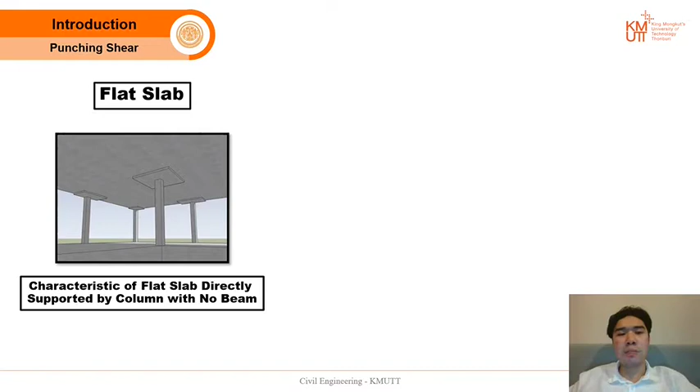Moving to our introduction: nowadays people use flat slabs for a series of advantages by eliminating beams. Concrete formwork and scaffolding are simplified, making construction faster, easier, and less expensive. But since the flat slab is directly supported by the column, it is more vulnerable to punching shear failure compared to other conventional slabs.

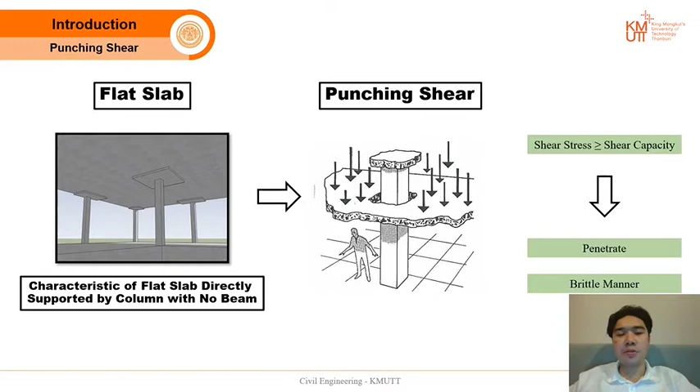Punching shear failure in a flat slab occurs when shear stress exceeds shear capacity, causing the slab to penetrate through the column as shown in this figure. To prevent this, we need to strengthen the slab against punching shear failure.

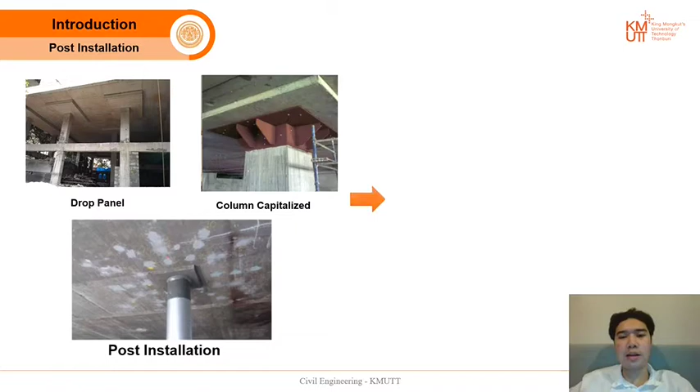This slide shows all the methods that can be used to strengthen the slab: drop panel, column capital, and post-installation. We selected post-installation because it maintains the original geometry, keeps the intervention invisible, and does not increase size or weight.

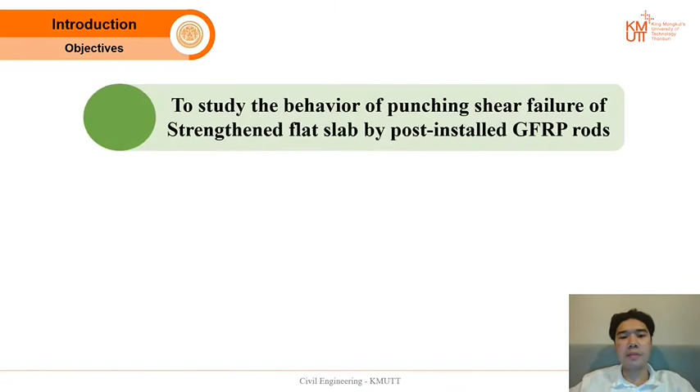Our objectives: first, to study the behavior of punching shear failure; second, to study the effect of at least three strengthening patterns, consisting of cruciform, double line, and radial.

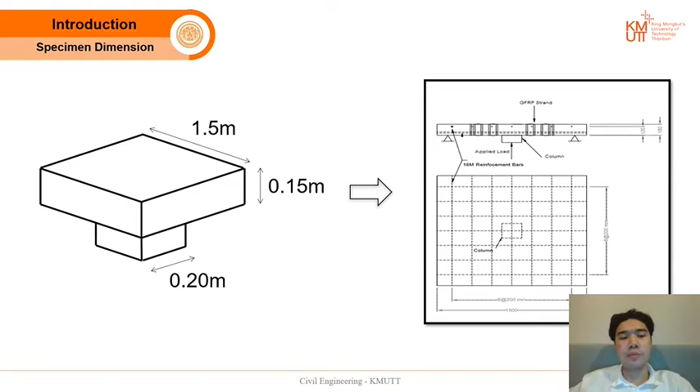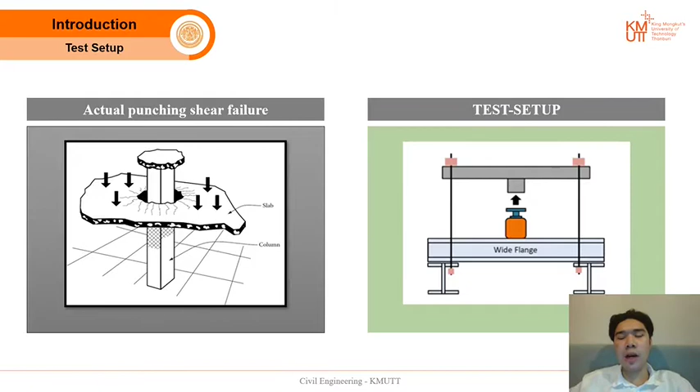Moving to our test setup, shown in the right figure, our test setup was simulated to match the actual punching shear failure that occurs in real construction, by applying force with a hydraulic jack upward into the point of the column.

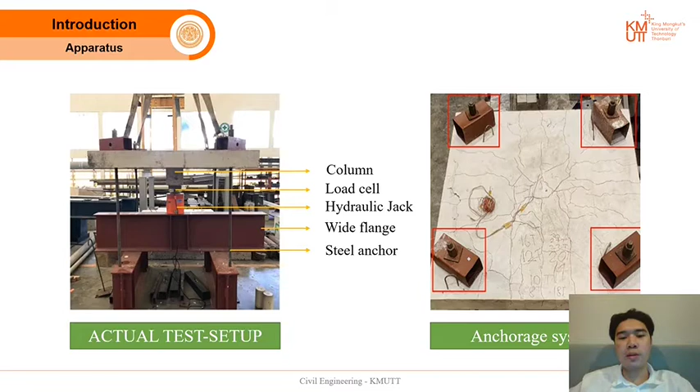This slide shows the apparatus used in our test setup, and the specimen is held into the test setup using an anchorage system.

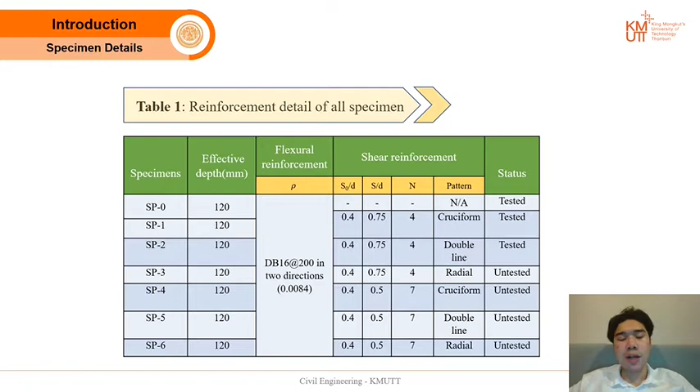Moving to our specimen details, which are classified into three different patterns: cruciform, double line, and radial. Each pattern is divided by a different number of rebar lines, with 4 and 7 respectively, as shown in this figure.

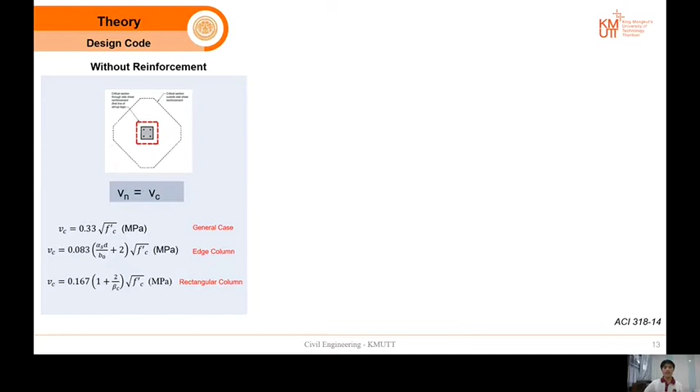Shear strength is referred to design code ACI 318, version 2014. For a flat slab without shear reinforcement, shear strength is provided only by concrete, with three equations governed by the minimum equation. With shear reinforcement, and failure within the shear reinforcement section, shear strength is provided by both concrete and shear reinforcement, with a limit imposed on the cumulative strength to avoid concrete crushing.

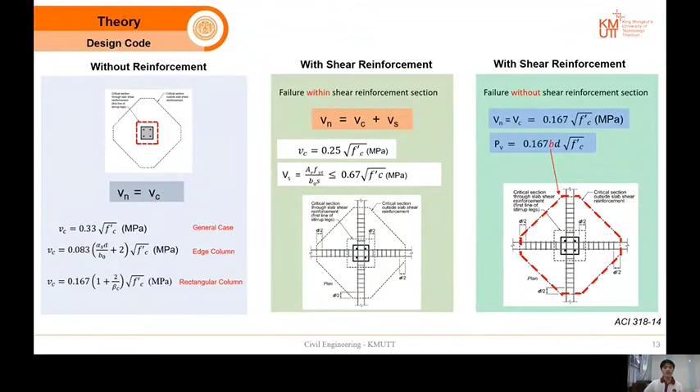In the case of failure outside the shear reinforcement section, shear strength is provided only by concrete, and the critical section spreads out from the shear reinforcement zone equal to half the effective depth. For calculating flexural capacity of isotropic two-way flat slabs, the Johansen yield-line theory is introduced.

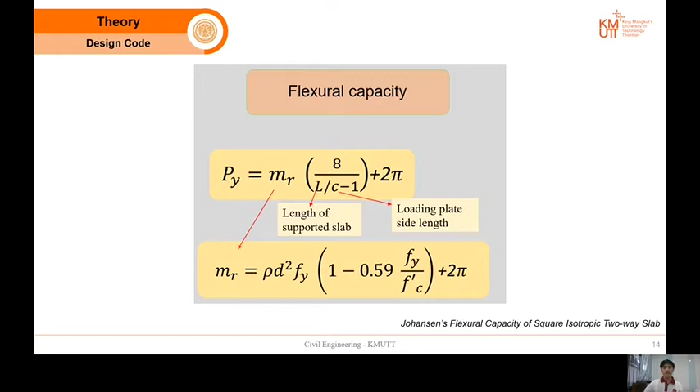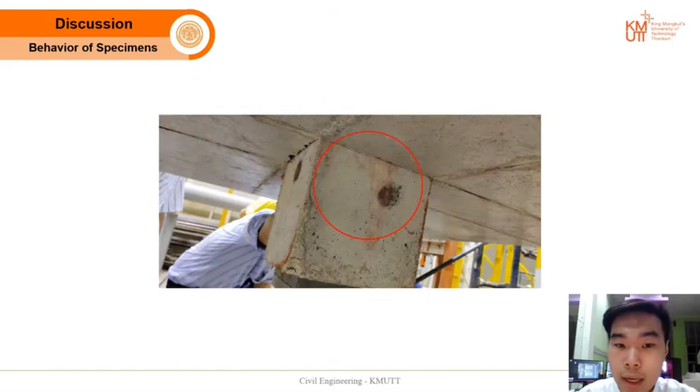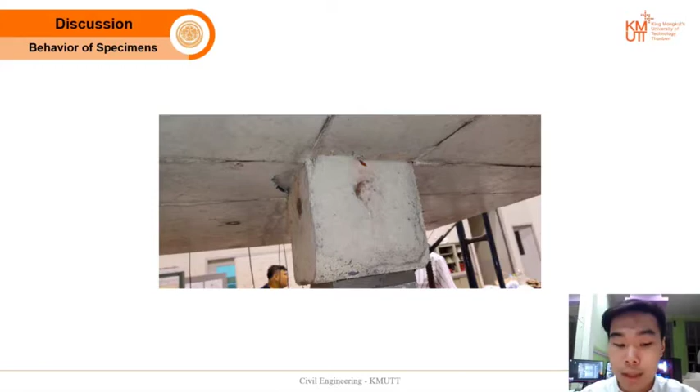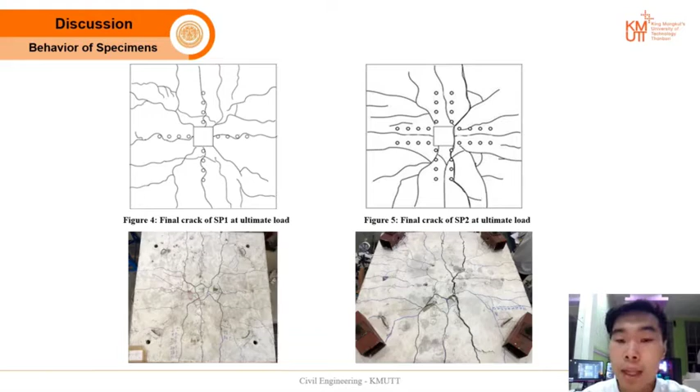Now for SP1 and SP2: they exhibit a completely different crack pattern from SP0. Their cracks look like a line running through the middle span of the sample, making it look like the sample bent. Strain inside the rebar suggests that SP1 and SP2 failed under flexural mode. Not only do they share a similar crack pattern, they also share a similar ultimate load. However, SP2 exhibits 25% more deflection at the ultimate load, meaning SP2 bends 25% more at the ultimate load than SP1.

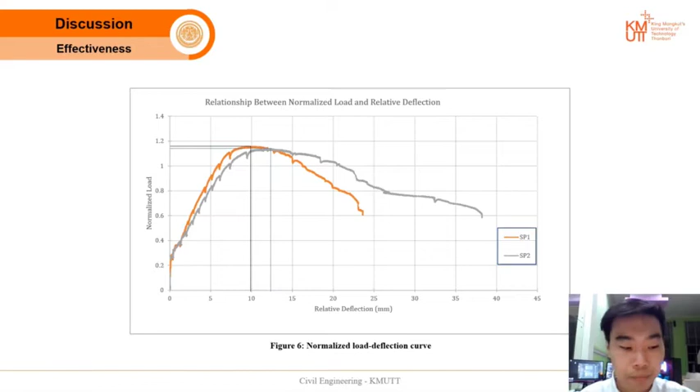When we plot all the specimen load and deflection curves side by side, they appear similar and can be categorized into three parts: the incremental part, the turning point or ultimate load, and the decremental part. In the first part, all specimens exhibit a linear trend, which we call the elastic trend of the curve. After reaching the ultimate load, the decremental behavior depends on how the sample failed, or which limit state governs.

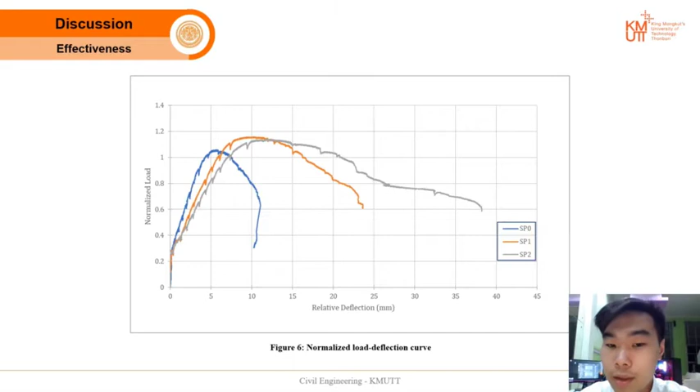For example, SP0 shows a sudden drop in load, and it fell under punching shear. This means that SP1 and SP2 fell under a different type of failure mode, which is the flexural mode. You can see that the decremental part of SP1 and SP2 seems to be a lot more gradual compared to SP0. Take a look at the summary of the ultimate load of all the tested specimens.

With SP0 where there is no shear reinforcement at all, SP1 where there is a certain amount of GFRP strengthened, and SP2 where there is even more amount of GFRP. You can see that SP1 exhibits a higher ultimate load than SP0 since there is a shear reinforcement inside.

But however, SP2 has a similar amount of ultimate load to SP1. It shouldn't happen that way, but it happened that way because the punching shear capacity has surpassed the flexural capacity, which caused the flexural failure to govern the SP1 and SP2 specimen. This means that strengthening by GFRP can increase the amount of punching shear capacity.

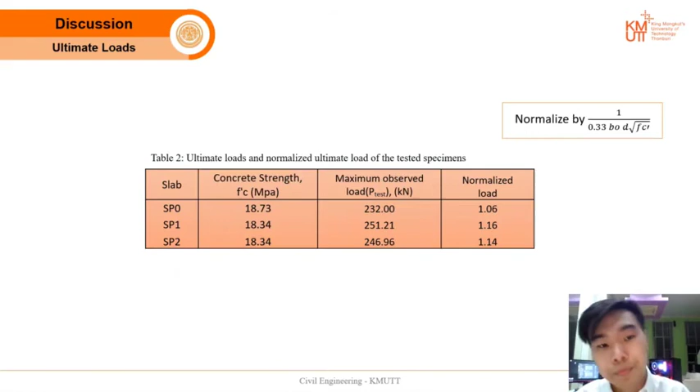Not only the punching shear capacity that strengthening by GFRP provides, but it also increases the amount of ductility of the specimen too. The ductility is defined as the relative deflections at 20% drop of ultimate load on the decremental part only, to the relative deflections at Y point.

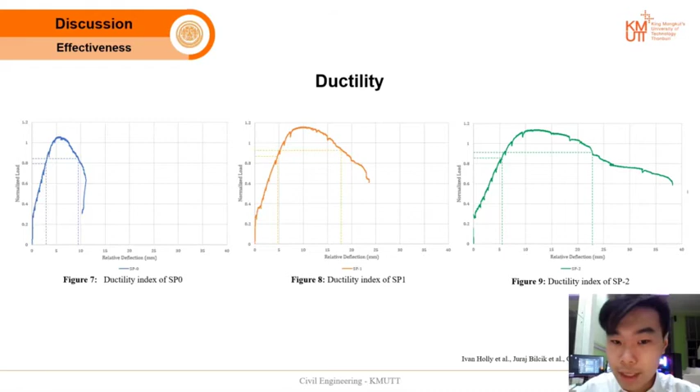So we calculated the ductility gain from post-installing GFRP into this simple table. First, SP1 exhibits around 14% increase in ductility with around 2.4 meters of GFRP embedded.

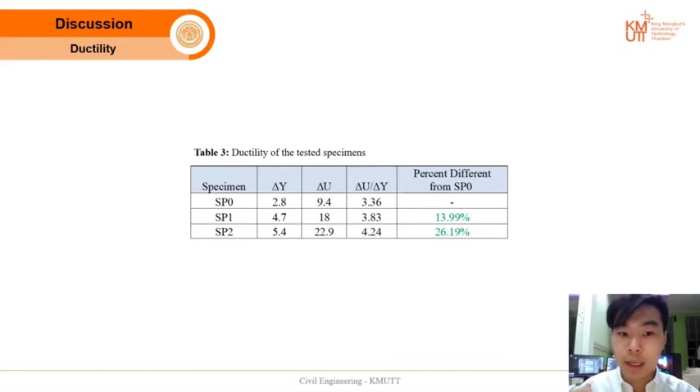But for SP2, where there is twice the amount of GFRP, it increased the ductility of the sample to 26%, which is a significant amount of ductility that we are talking about.

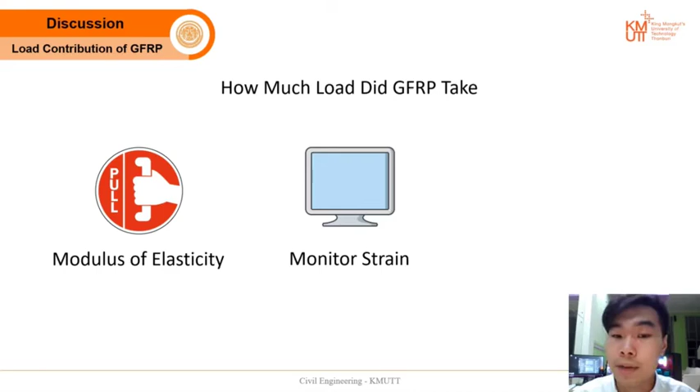So when we come to the load contribution of GFRP, it can be determined into three simple steps. Find the Young's modulus by tensile strength test of GFRP. Then we monitor the strain of GFRP during the test. Then we do some back calculations.

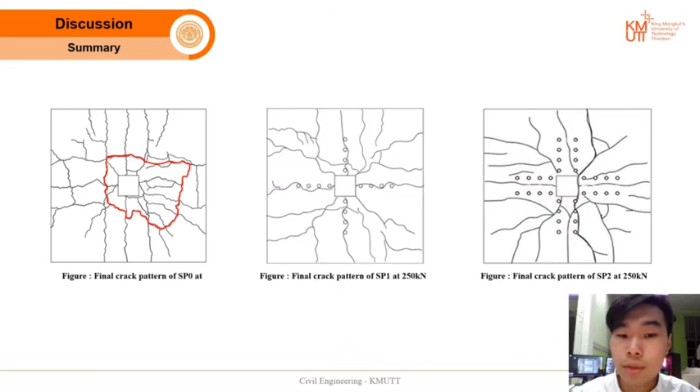We get that SP1 takes around 8 kilonewtons of load and SP2 takes around 36 kilonewtons of load, which is about 4 tons. Now to sum things up, let's change the complex figure name into something even more simple.

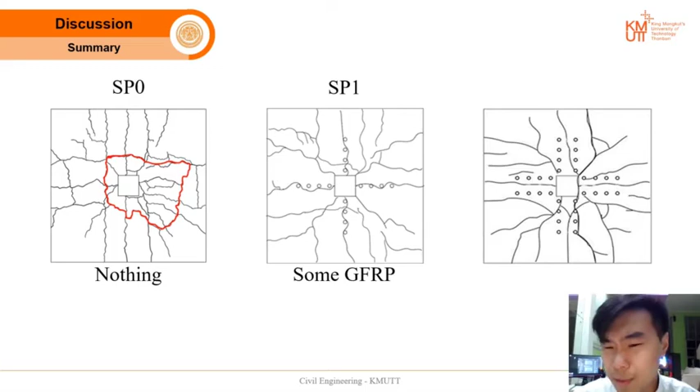So SP0 is going to be nothing since there is no reinforcement. SP1 is going to be some GFRP and SP2 is going to be lots of GFRP.

In terms of limit state, all the flexural capacity of all the specimens are equal, but however the punching shear capacities are different. For example, SP0 where there is no shear reinforcement at all, the punching shear capacity was governed since it was lower than the flexural.

But when we put some GFRP inside, the punching shear capacity increased and it surpassed the flexural reinforcement, so we get the ultimate load of SP1 to be around 1.15 and SP2 too.

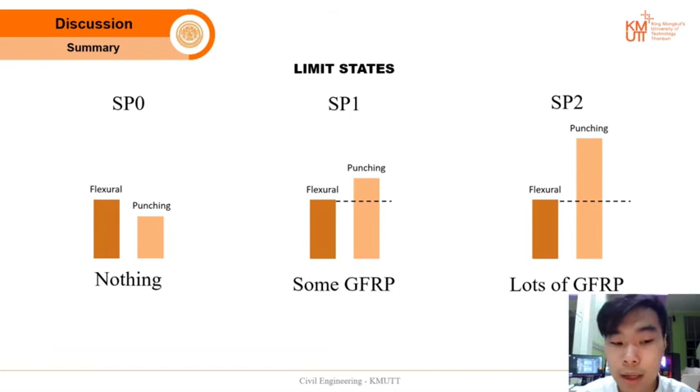The punching shear capacity of SP2 also surpassed that of SP1, but however it failed at a similar load since flexural capacity was governing. That's why we get a similar amount of ultimate load.

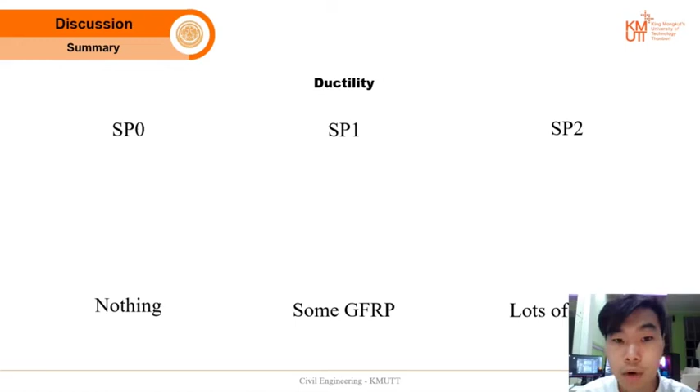This project can be concluded that our slabs were strengthened by using GFRP loops. The shear strength is improved and adequate to prevent punching shear failure. It means that the failure mode shifted from punching to flexure.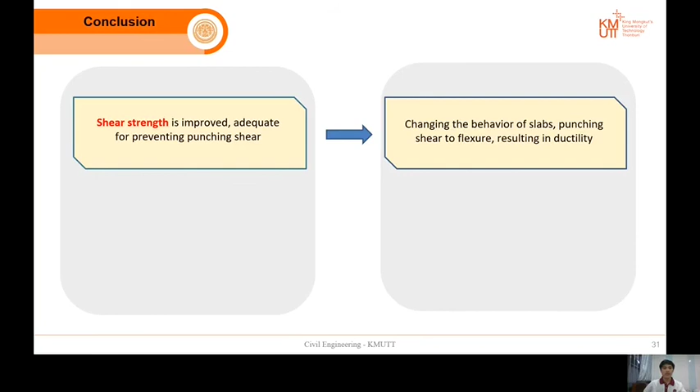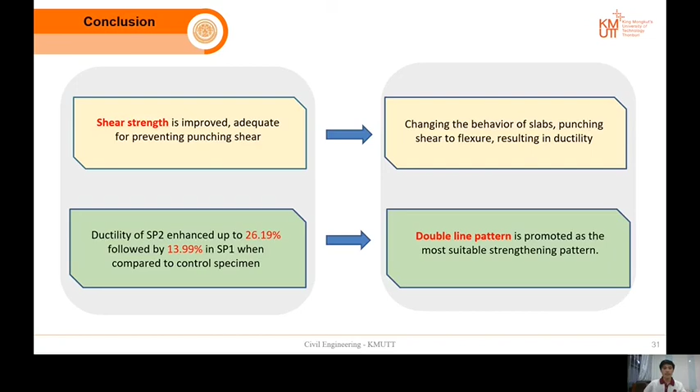In case of ductility performance, slab SP2 gained the highest ductility with approximately 26%, followed by 14% in SP1, when compared to the control specimen. Therefore, the double line pattern is discovered as the best strengthening pattern.

The GFRP loop proved that it can enhance shear capacity beyond the flexural limit state. Thus, SP3 to SP6 shall fail under flexure also.

Furthermore, among all of them, some have more shear reinforcement than SP1 and SP2. Due to closer spacing of shear reinforcement, the net area of concrete is decreased.

SP1 and SP2 exhibit first crack at the location of shear reinforcement with 80 kN at the beginning. For this reason, SP3 to SP6 are prone to reach first crack before 80 kN, but they may have greater ductility because closer spacing of shear reinforcement may effectively contribute to the load.

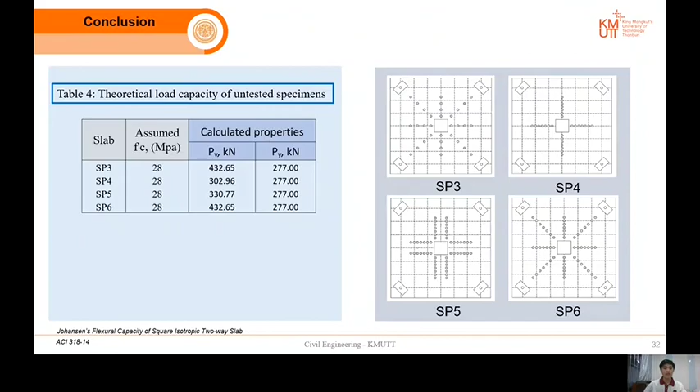I would like to wrap up now. So today we have talked about the introductions, the theory review, the discussions and conclusions. Thank you for your attention.